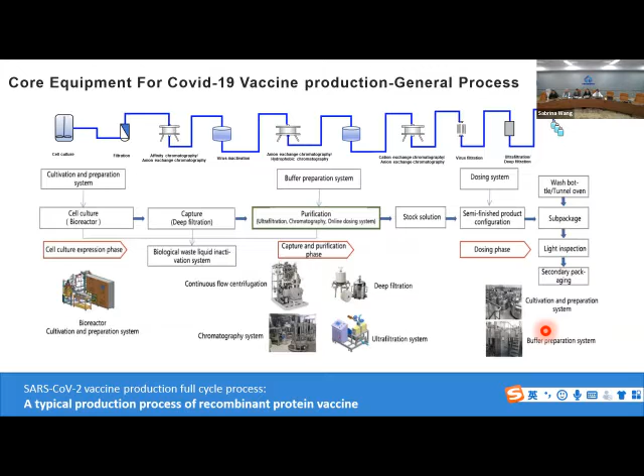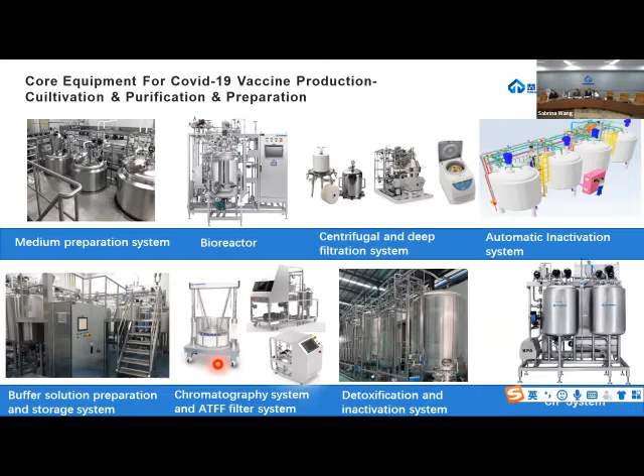On this page, you can see the core equipment for the COVID-19 vaccine, which is the cultivation, purification, and preparation process. Truking has an integrated solution of products and technologies for COVID-19 vaccine production, containing all kinds of core equipment for all key production processes, as you can see in those pictures. This includes medium preparation systems, bioreactors, centrifugal and deep filtration systems, automatic inactivation systems, buffer solution preparation and storage systems, chromatography system and ATFF filter systems, detoxification and inactivation systems, and CIP systems.

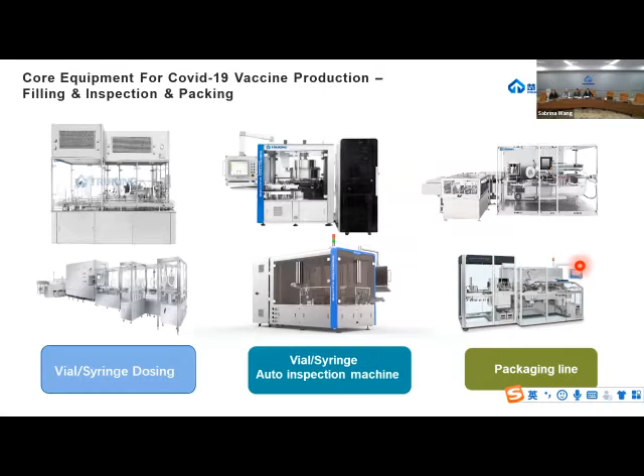On this page, you can see further equipment for the COVID-19 vaccine production, which includes filling, inspection, and packing equipment. In terms of filling, light inspection, and packaging, Truking has excellent performance and rich experience, especially in terms of equipment stability and high productivity, so we have outstanding advantages in the production of COVID-19 vaccines. Here you can also see the vial and syringe dosing equipment, vial and syringe auto inspection machines, and packaging lines.

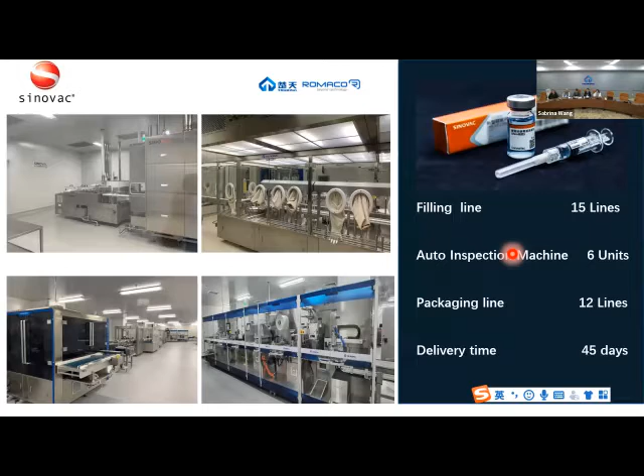On this page, you can see the main force in the production of COVID-19 vaccine, which is the company Sinovac. Truking offered in total 15 filling lines, 6 auto-inspection machines, 12 packaging lines, and this in an incredible delivery time of 45 days, which is a very impressive performance.

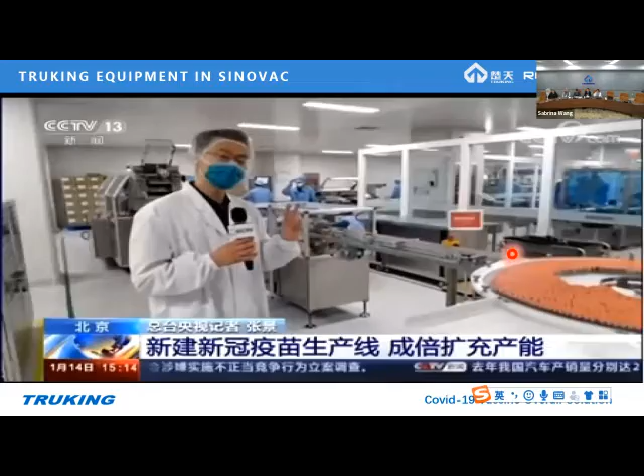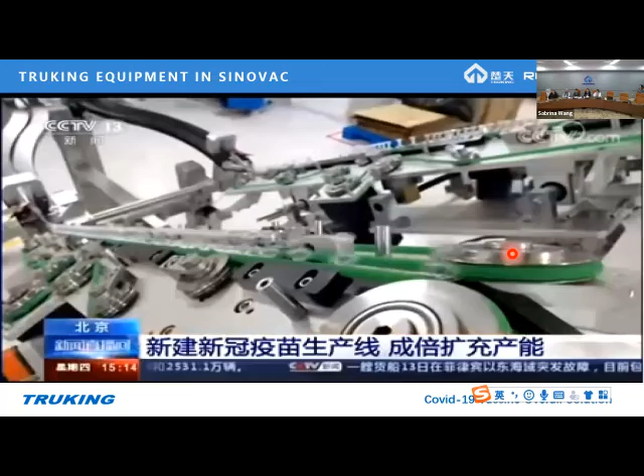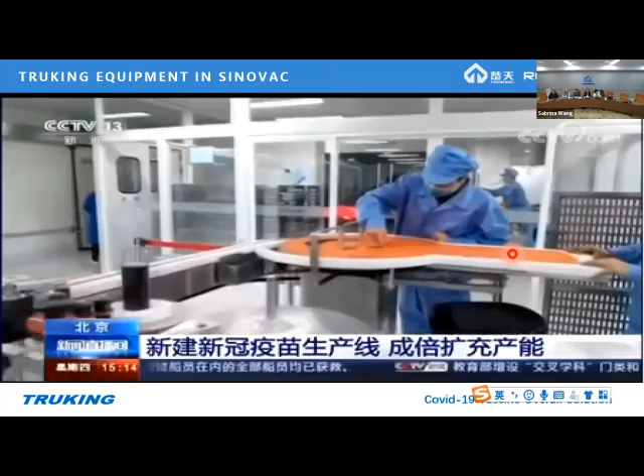Here is a short special report of China television where the Truking equipment was shown in the Sinovac plant. The reporter presented the two forms of vaccine at the pharmaceutical plant that produces the vaccine: one is the vial and one is the pre-filled syringe. This plant operates 24 hours a day with a 3-shift operation, and the daily production is more than 400,000 pieces.

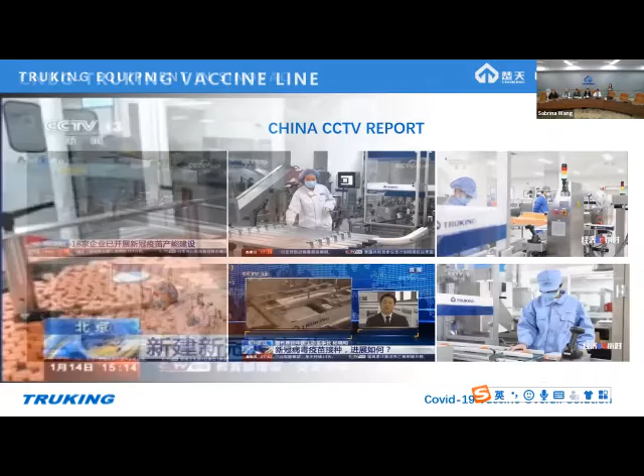On this page, you can see that the Truking equipment was reported by major Chinese media due to the good operating performance. So every day, the Truking equipment is shown on all kinds of television channels in China, and it's always referring to the good quality, stable performance, and high efficiency of our production lines.

The COVID-19 vaccine is rolling out around the world, so we have more and more satisfied customers and countries using the Chinese medicine. Some examples are countries like Chile, Serbia, Morocco, Azerbaijan, Turkey, Egypt, Indonesia, Hungary, and the Seychelles. And the number of those satisfied customers and countries is increasing day by day.

In 2017, Truking acquired the Romaco Group, so Truking is the Chinese market leader for liquid filling solutions. By acquisition of the Romaco Group, they gained the experience and expertise for the solid dose preparation equipment, which means now we are able to provide the full range of pharmaceutical products. And we have a continuous technology, production, and quality transfer between all our production sites around the world.

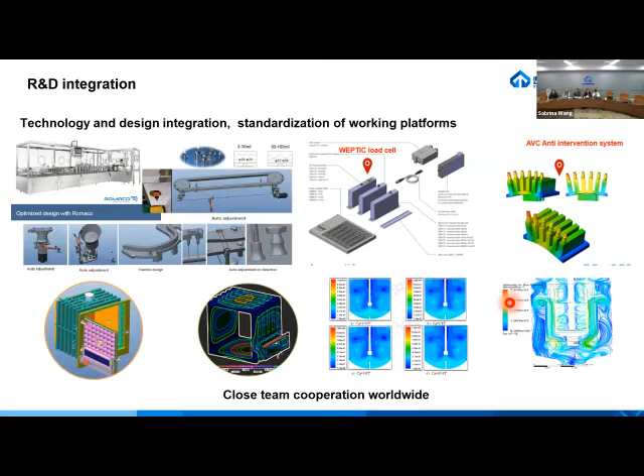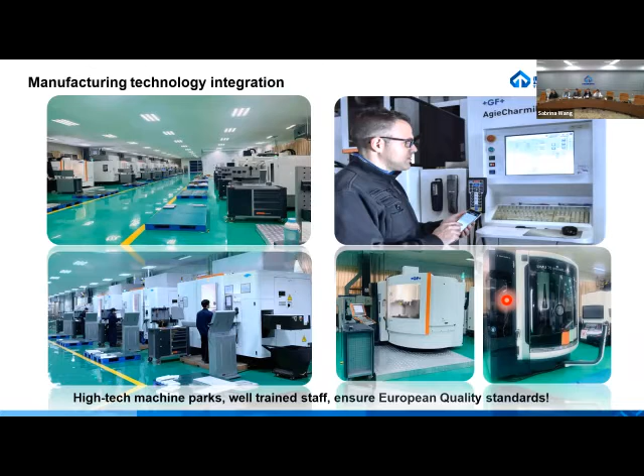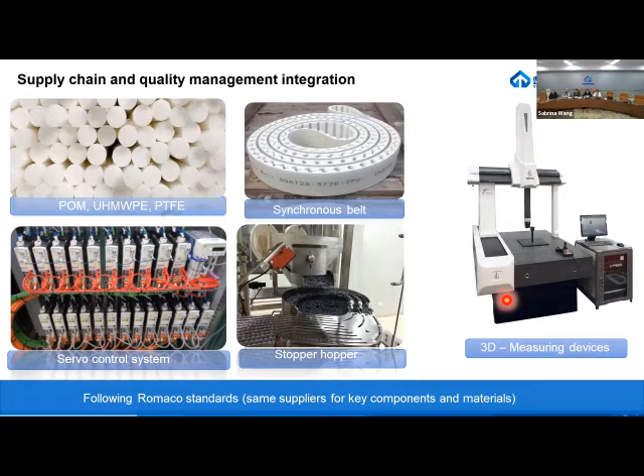Our experts team from Romaco, which is permanently here in Truking based in Changsha, is, for example, Mr. Ralph Gross, who is just sitting next to me. He's our processing director with more than 30 years experience in the processing pharma industry.

So this was a short introduction from my side, and now I will hand over to my colleague.

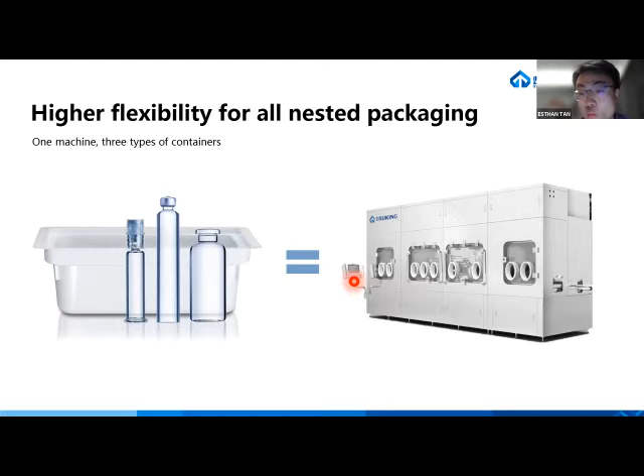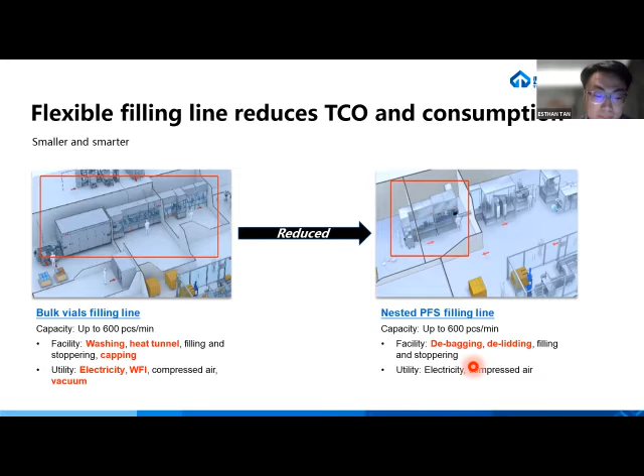Okay, let's make a summary. If the PFS solution is used to replace a vial, it can save up to 25% of the actual filling volume, 40% of equipment cost, 30% of the clean room space, and 40% of operating cost, due to the reduction in consumption of personnel and energy.

Therefore, it is believed PFS is a better solution for vaccine production.

For Truking, we can provide a complete solution for PFS, including primary packaging, inspection system, and secondary packaging. And there is a portfolio for primary packaging.

In general, combined with your requirements on capacity, we can provide four series: Smarten for small batch, Roboticon for middle batch, Ultron for middle batch, and Extreme-N for big batch, just like vaccine production. Each type of line consists of a debagger machine, a delidding machine, a filling and stoppering machine, and a matching barrier system—RABS, or isolator.

And today, I'd like to introduce Extreme-N, the better choice for vaccine production.

As shown is the Extreme-N filling line. The whole line is composed of an automatic debagger machine, an automatic delidding machine, and a filling and stoppering machine. The maximum capacity of the whole line can reach 36,000 pieces per hour. Now I will play the video.

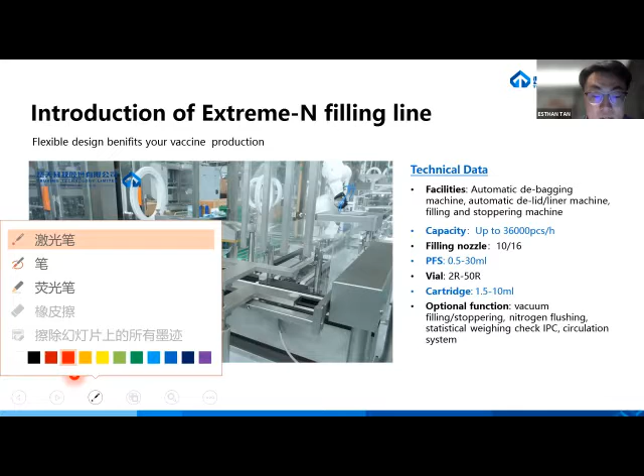For the automatic debagging machine, when the tub is sent in, the machine will clamp one side of the bag and cut it off. The cut-off piece will be collected automatically. When the cutting is finished, the tub will be transported to the outputting station.

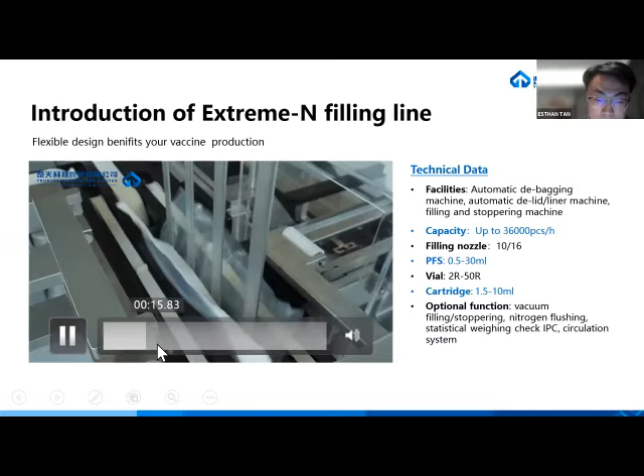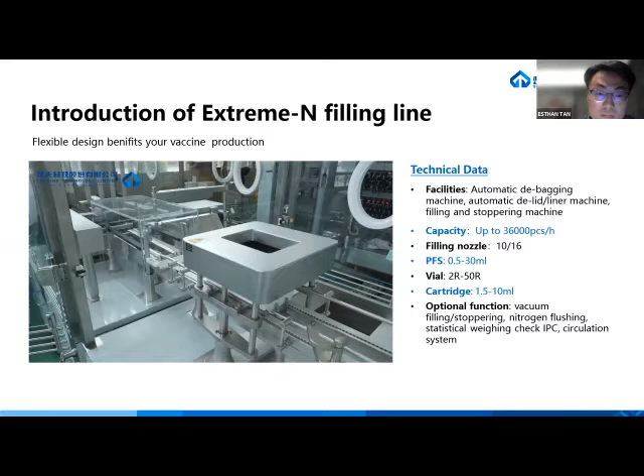Meanwhile, the end of the bag will be clamped, and then the tub will be pushed out from the bag and sent to the delidding machine. The bag will be collected automatically. We designed a special protection channel to avoid particle contamination caused by bag cutting.

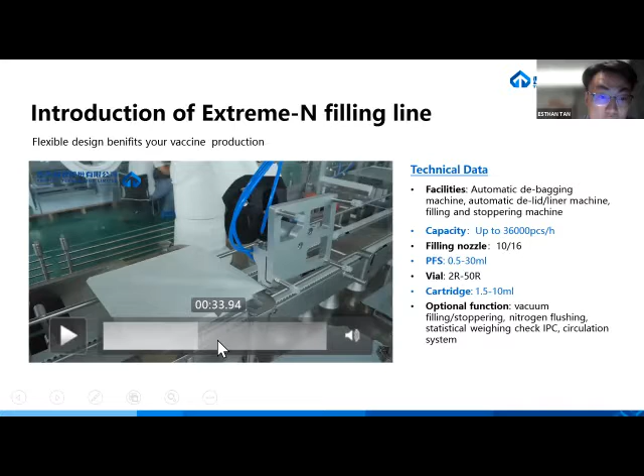Then the tub is sent to the preheating station to heat the top of the tub. This process can reduce the amount of particles generated during lid opening.

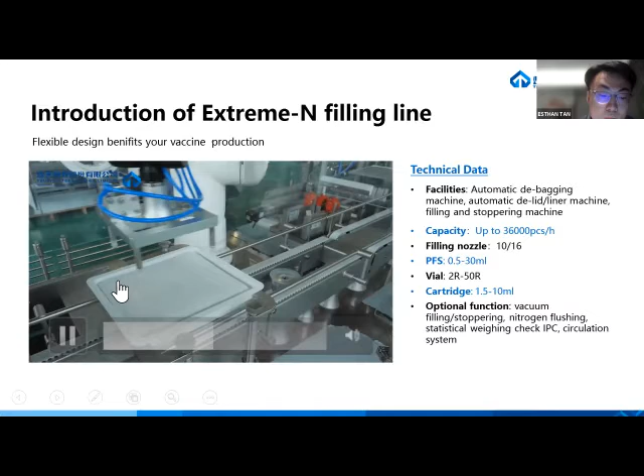After preheating, the tub will be transported to this position for lid removal. We use a sterile robot to complete the delidding and deliner process. The 6-axis robot can provide excellent actions that 4-axis robotic arms can never do, as you can see. The robot moves just like a human hand, turning and uncovering the lid instead of pulling it upwards stiffly.

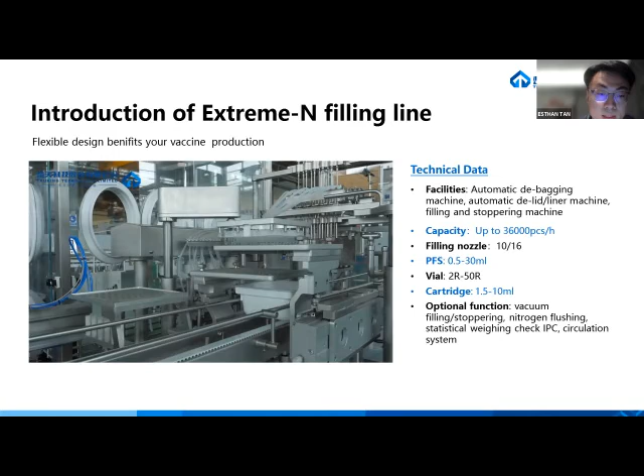The liner. After lid removal is completed, the tub will be sent to the filling and stoppering machine.

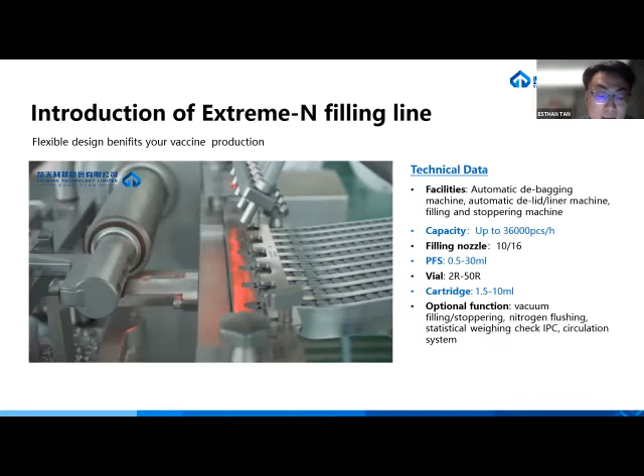A nest-loading fork will pick the nest up and put it into the centering plate. Our centering plate uses a sandwich design, meaning a middle plate can slide inside the structure. When the syringe is put in, the syringe can be clamped to ensure stable production.

You can see a shake of the centering plate to help the syringe enter smoothly. There are also sensors equipped to ensure that all the syringes are accurately placed into the centering plate. Now the filling and plunger inserting, as the video shows, is a mechanical stoppering system.

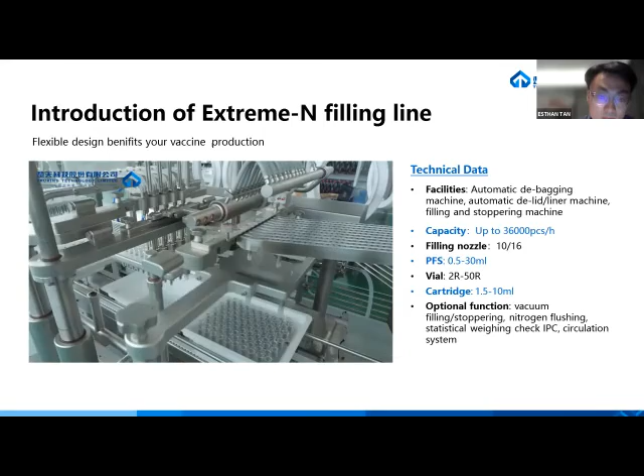To check the stoppers, mechanical stopping. Finally, the nest is put back to the tub and the conveyor carries it out.

In addition to higher capacity, the whole line also has the following design that can bring benefits for production.

The first is debagging. The main risk at this stage is that the outer bag may contaminate the inner tub. As we know, the outer bag will usually be opened under the Class C background and Class A laminar flow protection, which means the outer bag is not sterile. If the outer bag contacts the tub, it will cause tub contamination. We use a special suction design to ensure that the mouth of the bag will be pulled by suction cup when the tub is being removed from the bag, which ensures that the outside surface of the bag will not contact the tub.

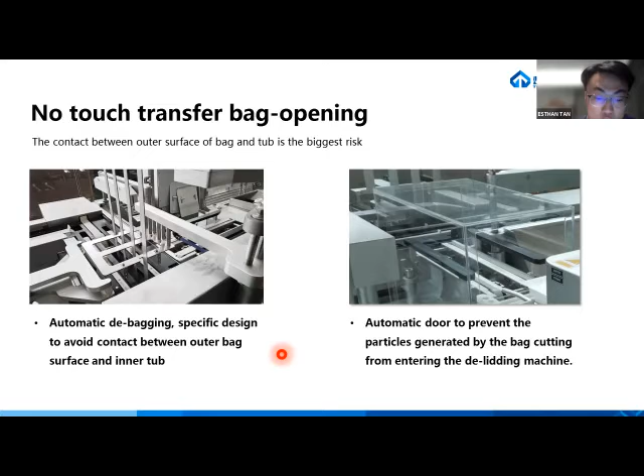In addition, some plastic particles will be generated during the bag cutting process. We also designed a protection chamber with a double automatic door to ensure the tub will not be contaminated by particles. In this process, there is no additional mechanism such as a suction cup that will contact the tube. So we call it no-touch transfer, the nice solution for debagging.

For the automatic delidding machine, we provide a 6-axis robot, which is different from other manufacturers. Many manufacturers only provide 4 axes. This method reduces the requirements for the heating temperature, and at the same time, due to the high accuracy of the robot, a good and stable delidding is ensured.

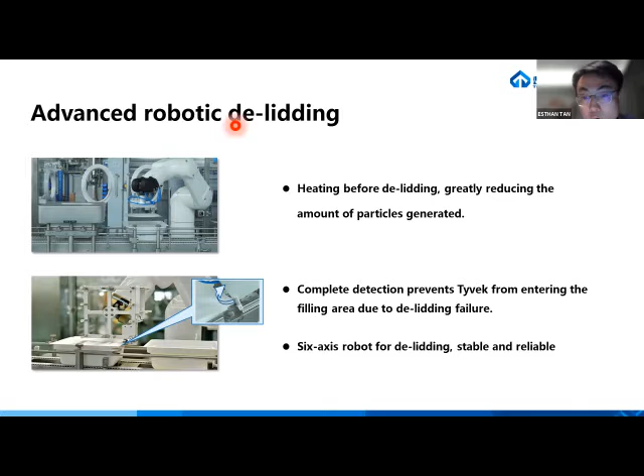At the same time, a complete detection system like lid or liner collection detection is used to check whether the lid or liner are removed properly, and air pressure in the suction cup is used to detect whether the paper is taken properly, and sensors check whether there is a liner in the tube directly. The detection can effectively prevent the failure of the tube carrying the liner into the filling machine. We can see robotic delidding is almost a perfect way of delidding.

In addition, we have a complete detection system to avoid failures during the filling and stoppering process, like abnormal syringe emergence detection. Sometimes, because of defects of the materials, a bad syringe, some of the syringes in the nest may be pushed up from the nest, which will cause the syringe to break. So we set sensors to check if all of them are put into the centering plate properly.

If some issues happen, the centering device will go back and open the slide plate, which is used to clamp the syringe during filling, then open and shake them down to the right position.

In addition, sometimes due to wrong operation, the coordinate device will transport the syringe to the wrong position, which will cause damage to the filling needle and the plunger insertion tube.

In order to avoid this damage, we set up filling needle and insertion tube detection to ensure it is in the right place. When the device position is wrong, the filling needle and stopping tube will be pushed up rather than broken, and the machine will stop immediately.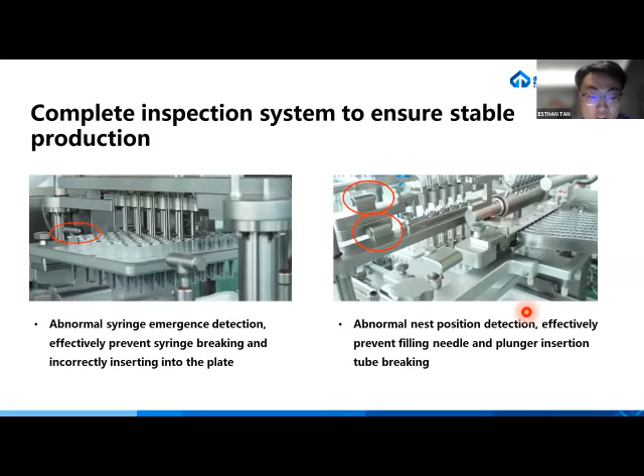Okay, the above is a part of primary packaging. As you know, Truking can provide a complete solution, so what's more?

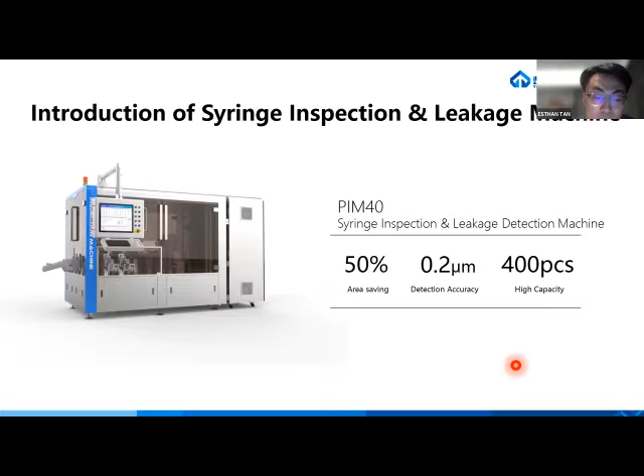Truking can provide advanced inspection and leakage detection machines. The PFS automatic inspection machine can meet a capacity of 400 pieces per minute with a full servo system, meaning the whole system will be more stable and flexible. Compared with other suppliers, the PIM40 can benefit your TCO, total cost of ownership, up to 50% savings, and can meet an accuracy of 0.2 micrometers on leakage detection.

Then I'd like to take a video to show the whole process on the machine. And as you can see, the right part of the slide reflects the machine cover. Let's play the video.

Here is an infeed row, which is controlled by a servo system. Then the turntable will take syringes into the downstream.

And actually, we have a flange detection here. That means if there's a syringe with a defect on the flange, it will be rejected at first. And the black one, this one, will be put out this way, rejected.

And here is a rotation station to rotate the tip of the syringe up and transport them to the inspection station.

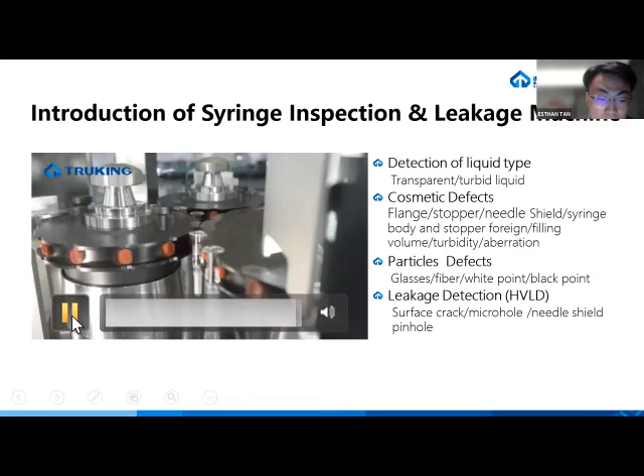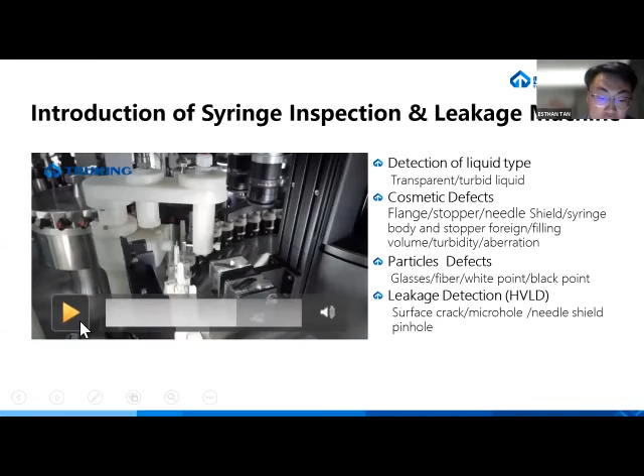You can see syringes are transported smoothly. This turntable is for inspection, here for visual detection, and this place is for leakage detection, then rotation again. In the end, the rejection system divides rejects into 3 types: cosmetic defect, leakage problem, and particle defects.

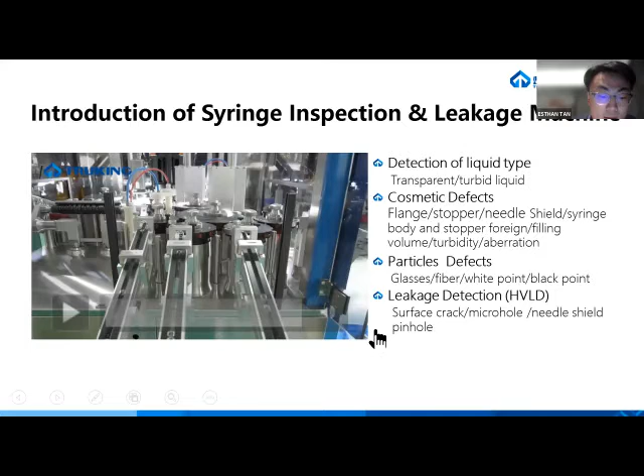Besides, Truking can also provide secondary packaging solutions, a fully automatic packaging production line from blister, cartoning to palletizer. Let's take a look at the video. Here's a denesting machine.

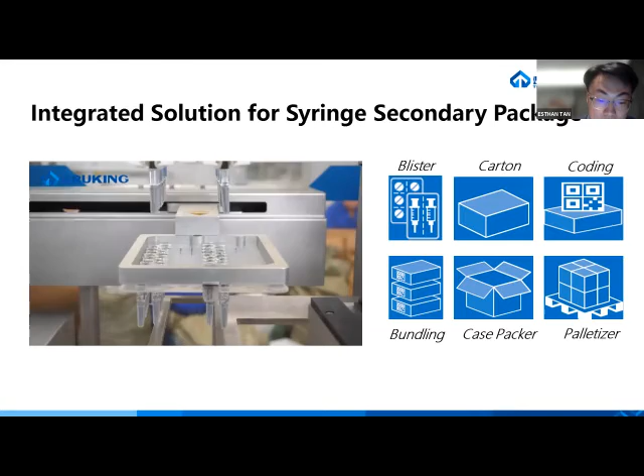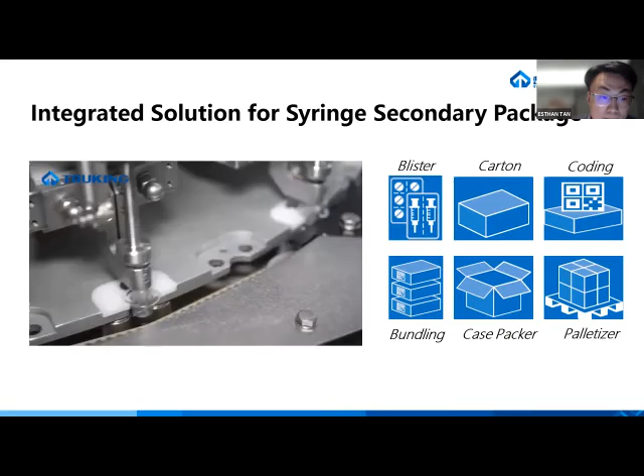The nest remover frame will pick the nest from the tub, and the tub will be collected automatically. We use a robot to do the denesting process. The syringes will be transported to rod insertion one by one. Here's the rod insertion, and here is the labeling.

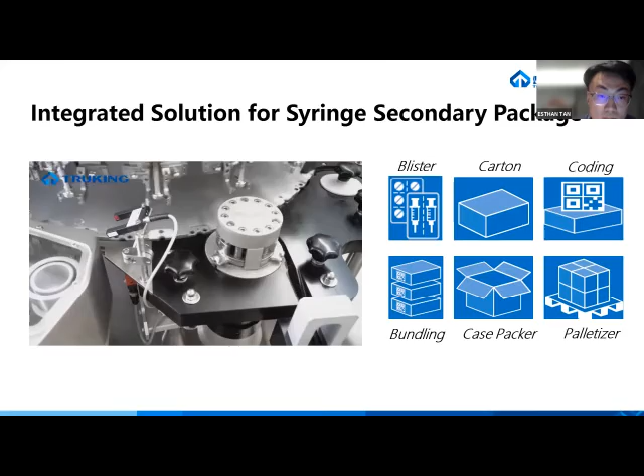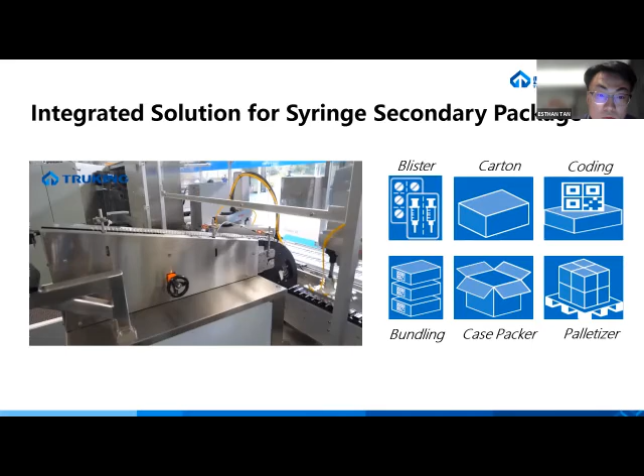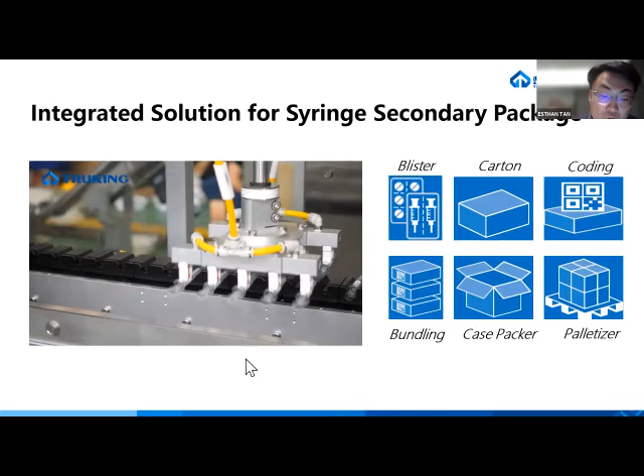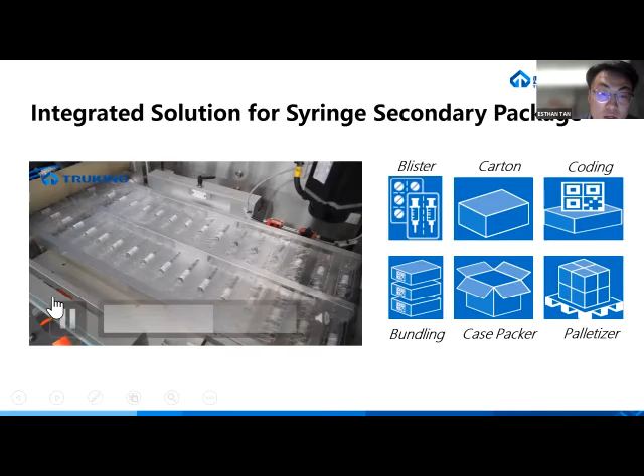After the rod insertion and labeling process, the syringes will be transported to the blistering station. The PVC here is for blistering, and you can see the machine provides shape detection on the blister. Then the syringe will be placed into the blisters one by one. We also use a robot to do this. And here is for sealing.

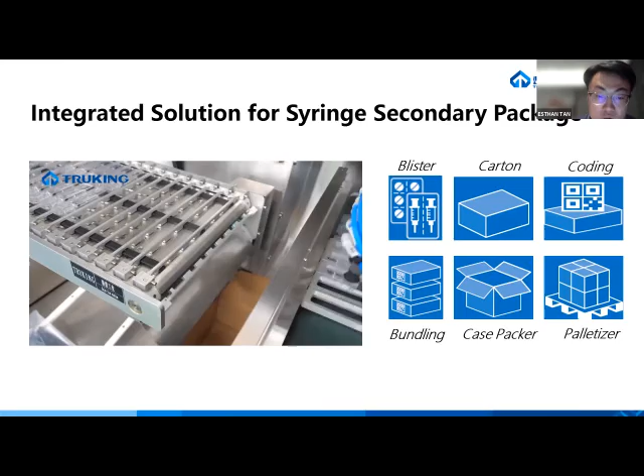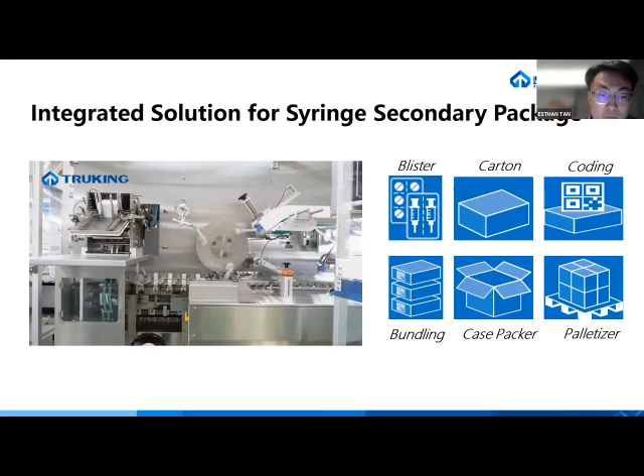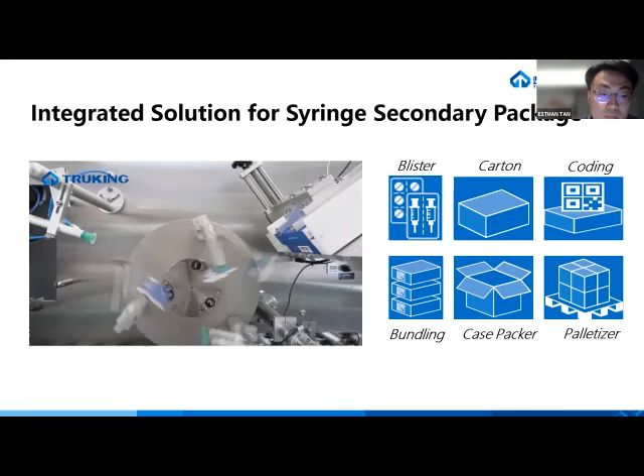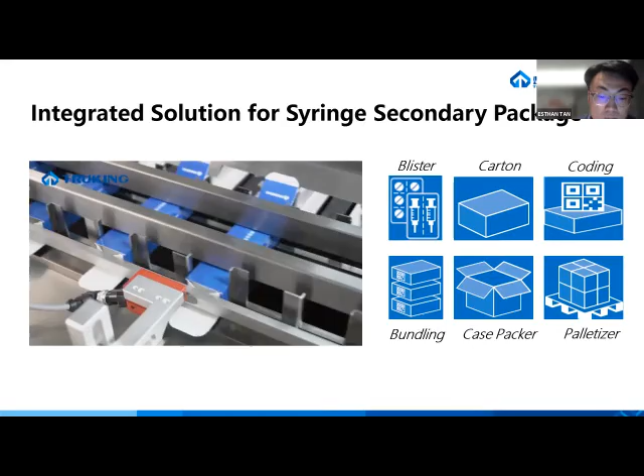Next to this station is for cutting. After the process, the syringes will be transported to the cartoning station. Here is for box opening, and you can see the speed is very fast. Then the box will be transported for box folding, and now output to downstream.

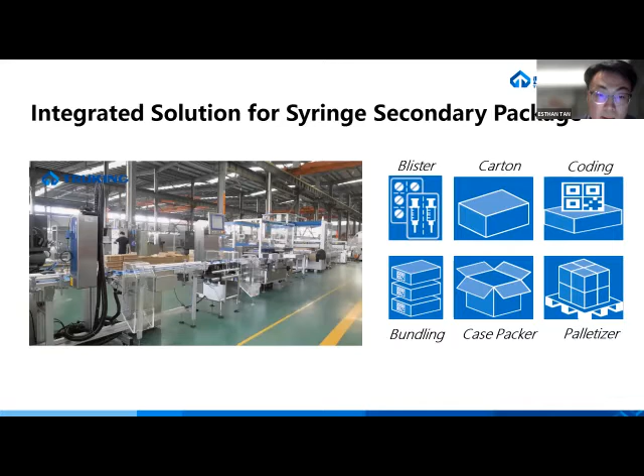As shown in the video, here are the core equipment for secondary packaging: the plunger rod insertion and labeling machine PPL20, blister machine DPP380, and cartoning machine HW400. The production capacity of the combination of these can reach 300 pieces per minute.

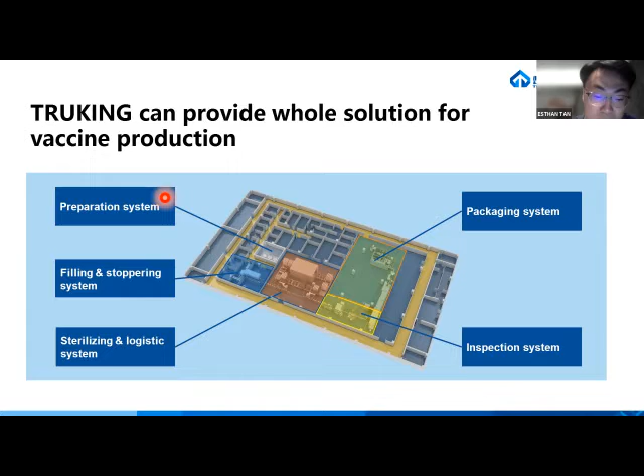Up to now, I think you already have a profile of Truking's PFS solution. In 2020, we provided more than 72 packaging lines for vaccine production. I can say we have rich experience in this field. We always stand with the pharmaceutical industry to face the challenge from coronavirus, and we believe we will beat it together. Truking can provide a high-quality solution with shorter lead time. We are always here looking forward to more cooperation with you. Many thanks for listening.

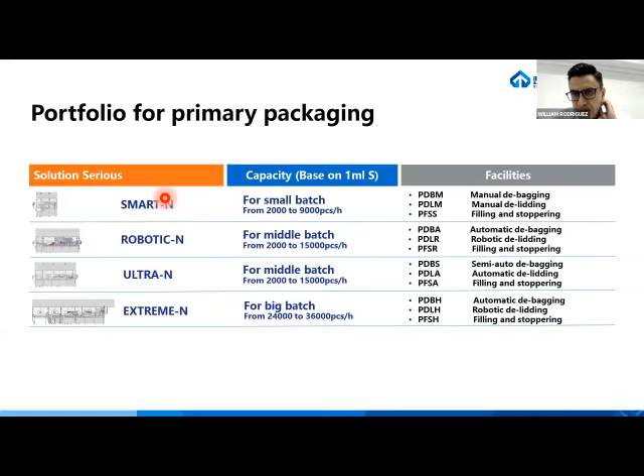I have a question for you. The solution that you are presenting here is the PFS solution, but in reality we have a lot of shortage in terms of glass type 1 materials. I don't know if it's possible to have enough material nowadays worldwide to use these kinds of machines.

Sorry, please wait. Sabrina? Could you help me with a translation? Sorry sir, could you ask again? You can ask in Spanish if you prefer, no problem.

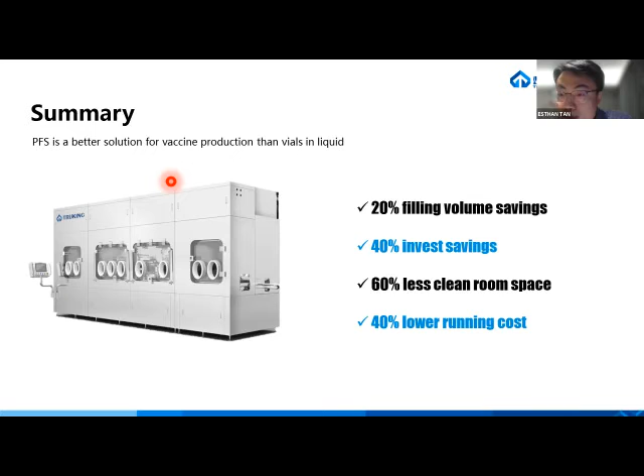Okay, the question is: we have had a shortage of glass type 1 material. How can you guarantee that this material, which you have a shortage of, is available? The question is they have a shortage of glass type number 1 material. How easy is it to get materials to use the machine worldwide? Because normally, if you don't have the glass, you cannot use the machine. So they are asking how easy it is or how we can find these materials easily.

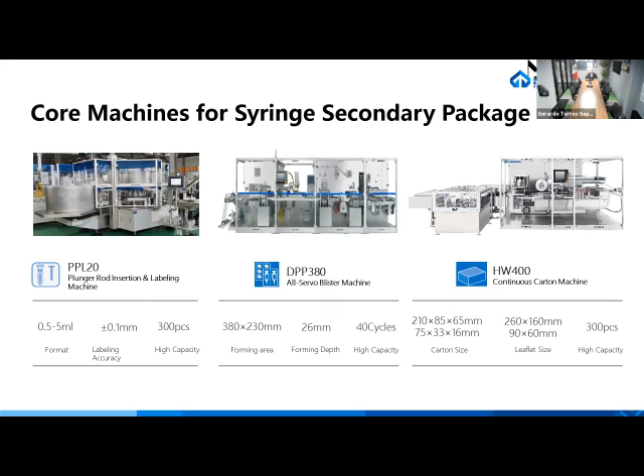Gracias, Sabrina. Gracias por allá en Truking. Thank you very much. Mr. Ewing, Kai, and Stefan. Felicidades, estuvo increíble, thank you, Sabrina. Thank you. Thank you very much. Well, we are trying to be close to our customers. Les mando besos, felicidades, Gerardo, felicidades a todos. Thank you. Yes. Thank you. Thank you very much.